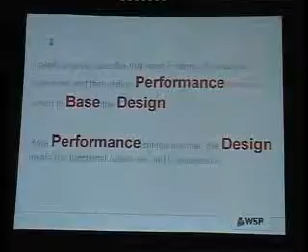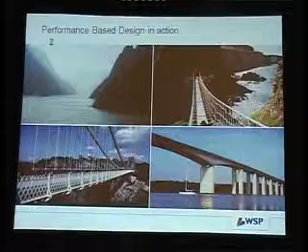If you imagine you've got a gorge you want to build a bridge across, nobody starts off by saying, I must have a steel bridge across my gorge. What they do is think about the different options. They employ an engineer who will think about what the needs are of that bridge, what it needs to carry, what its lifetime needs to be, what its costs are, what the aesthetics need to be, what the program for that bridge is. Then they come to a design conclusion that is appropriate for the performance it needs to meet.

We would think it completely mad to say every bridge has to be designed the same way, or that every tall building had to be designed structurally the same way. And yet that's exactly what we do with traditional fire codes. We make assumptions that all buildings of a certain type at a certain height are the same, no matter where they're placed, no matter how they're built, no matter how they're going to function. As a result, I think we're creating inappropriate building designs.

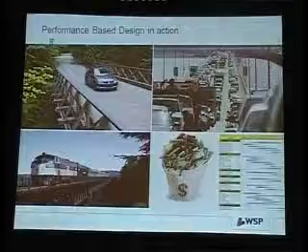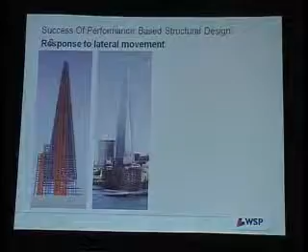So why have I shown a bridge example here? Well, I think it's a simple one to understand. Before we had tall buildings for structural engineers to show off with, bridge design was where it was at - the best structural engineers from previous eras designed the most fantastic bridges. But now we apply the same principles to structural design: we design for the performance the building has to meet. The result is great innovation in structural design.

This is the London Bridge Tower. It has an unusual mix of steel, concrete, steel design as you go up the tower, which takes out the need for mass dampers in the building. It's a great bit of innovation. No one said you had to build a building that was steel, concrete, steel. No one said you had to put a mass damper in. What they said was, I don't want it to sway too much, here are the limits, now design a building to match that performance.

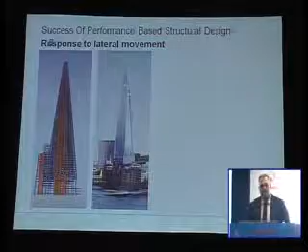We do the same thing with structures for seismic design. In fact, if we didn't design buildings performance-based for seismic design, we'd end up with horrendously over-designed buildings in some areas and badly under-designed buildings in other areas.

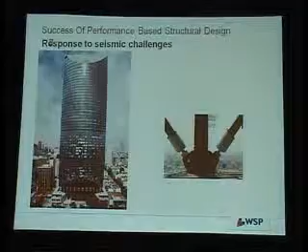It's wrong to think that people who are funding and building tall buildings have this magical pot of gold and aren't interested in cost savings. Of course we're interested in cost savings.

Even though we have the economic problems we have at the moment, even before that, even in places people think have limitless wealth, like Abu Dhabi and Saudi Arabia, cost is still very, very important. And economics is very, very important, and aesthetic is very, very important. And these things drive things like structural design.

And yet still, in so many situations, we don't design on a performance basis for fire safety. Instead, we design to a set of prescriptive, codified rules. And all too often, we're applying codified rules from one country to another country.

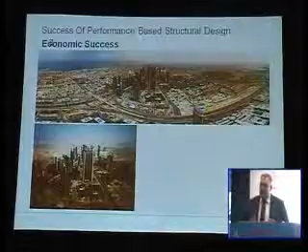There's no point in sitting there saying, well, if we adopt this different prescriptive code, it won't happen. I could show you examples of tall building fires, devastating tall building fires, related to any international building code. It's not that those codes are failing, it's just that there's inherent failure in using that particular approach.

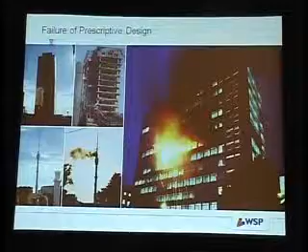The biggest problem with using prescriptive designs, taking a codified approach from one country to another, I think, is a design legacy. Those that heard Anthony Wood talking yesterday morning, he used the Seagram building to illustrate the fact that we shouldn't move architecture from one place to another. We shouldn't just cookie cut building designs.

Someone mentioned this morning in one of the sessions about the problems of pressurizing elevator shafts. The Indian code gives you a way around that. In fact, it prefers you not to use pressurization if you can do it. And it says instead put the stairs on the outside of the building.

Now that's quite a dramatic structural thing to do. But the reason it says that and the preference for that is because the problems of maintenance, of installation, of construction make pressurization systems very, very hard to design and build in this particular country.

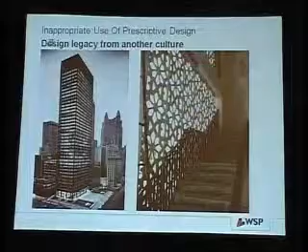It has to prevent smoke movement. It has to protect firefighters. It has to protect the means of escape. What does it mean to protect the means of escape? It means keeping smoke out for a certain period of time. What does it mean to protect firefighters? It means to protect them for a certain amount of time and achieve certain temperatures.

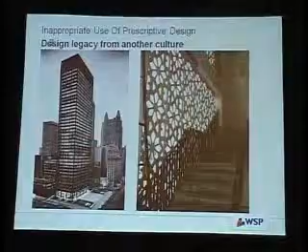Once you take away the premise that we're going to use a particular system type and instead say, what does the system have to achieve, you're using performance-based design.

Here in Mumbai, I think you are starting to see a certain architectural style forming. I love the extensive use of cantilevers and big holes in the buildings here. I think it's fantastic. I think the Antilia Tower is a classic current example of that.

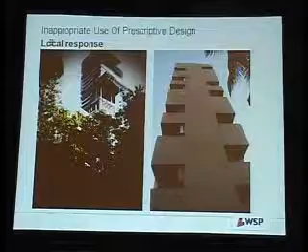There's a lot of people I've met, particularly from Western countries, who said it's a terrible abuse, that building—one family in 27 stories. But given the land values in Mumbai and the problems of floor area there, they're not taking up any more space on the ground than one family would occupy. Sure, they're building this edifice in the sky to celebrate their family, but I love the use of cantilevers and the holes in it.

And then you've got the older building there as well on the right, which again only has about 30 apartments in it. That to many people in the West would seem very strange. These aren't the sorts of buildings that traditional building codes were really designed around. To try and apply a traditional prescriptive building code to this type of building, you have to really bully it, twist it, and break it a bit.

And when you try and do that in a different country from the place the code was originally intended for, you start getting some real difficulties. You can make it work on paper, but you're really putting a lot of faith in that original building code and matching its original premises.

What you're doing is assuming safety. What performance-based design is about is proving and demonstrating safety. You're not leaving it to chance, or to someone who designed a building code 20 years ago that you're copying. You're actually setting out to prove that you have safety.

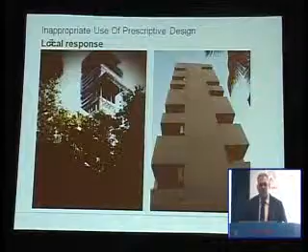If we're going to build these vertically integrated cities, we need to handle those sorts of questions. And you're not going to find those answers in standard building codes, because no one's been through that design process properly. If you want to build integrated mixed-use buildings, you'll find that very poorly handled in traditional building codes, which tend to pigeonhole buildings into one single type.

And when they do talk about mixed-use buildings, they have a habit of saying, well, just adopt the worst case. So you end up with buildings that waste money, waste space within them. And the problem isn't just that you don't build the building because it becomes too expensive—it's not just that you've spent too much money.

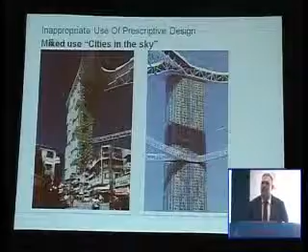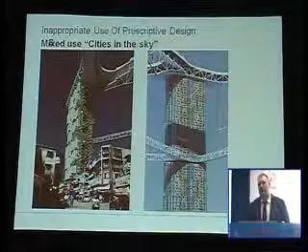If you took the same budget and applied that money elsewhere in the design, you could either save money or make the building safer. You could apply the money appropriately. So performance-based design isn't just about cheating a bit and trying to make things cheaper—it's about using the money appropriately and creating value in buildings.

So you want to create these buildings, but you can't do it through standard design. Yet there's a great fear about performance-based design, a great phobia about it. I think there are three fundamental phobias. The most significant one is the fear of putting your name to it—the fear of the signature.

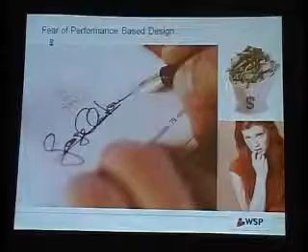I appreciate building code officials who have to sign off buildings. It's their name on a piece of paper, and they're the ones who may ultimately be held up in court if a building is found to be inappropriately designed. And yet they will happily sign off buildings designed to international building codes whose basis they don't know, and that aren't appropriate to that particular building. The faith put into international prescriptive codes is quite worrying.

At least with performance-based design, that building code official has the opportunity to question the design, to actually dig into the assumptions you're putting forward as a designer, and answer whether or not those assumptions are appropriate. And it becomes a partnership with the building code official—working with them, not against them.

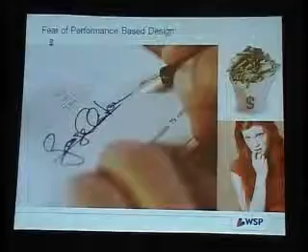Not trying to work around them, not trying to put something up there that's going to amaze them and just flatter them, but working with them to create something together and to gain their trust.

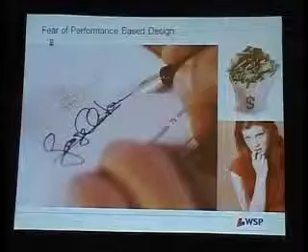There's some opposition that comes in from suppliers of building products. Sometimes they're worried about losing money when we have non-standard design solutions. A lot of performance-based design revolves around, for example, taking out fire protection products. Well, having standardized building products hasn't stopped the structural engineering community from working together with those people, and nor should it in terms of fire safety.

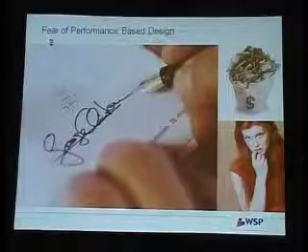In fact, performance-based design opens the door to many more innovative and new fire safety products. We hear people talking about lift evacuation, elevator evacuation. We hear people talking about innovative suppression systems. All of that is only possible through performance-based design, because there's a long lag between new technology and its application to building codes.

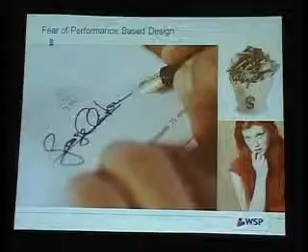And I'm afraid that can only be resolved through education, support, and working together with code officials, other engineers, and designers. So many times where I've carried out a performance-based design, the local engineer will be worried because they haven't understood it. And it's very easy for an engineer who's used to working in this sort of design to stand up and say, well, clearly that person isn't educated enough, or that person hasn't understood what I say.

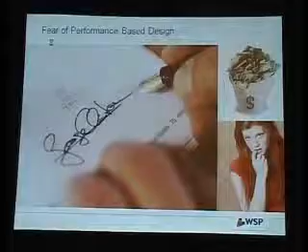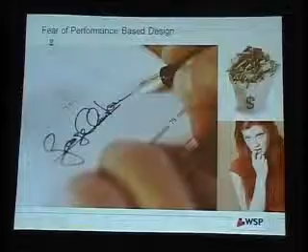My response to anybody in that position is that if someone hasn't understood what you're saying in your design, that's your problem, not theirs. You should be able to break performance-based design down into very, very simple building blocks and explain each individual block. If you can't do that, you're not doing it right.

Now, I've given international codes a bit of a knocking, saying they're probably the wrong way to design buildings. In fact, the international code community have responded to performance-based design brilliantly. You'll find in the latest versions of the NFPA code, the International Building Code, performance-based design options within there. My personal preference is that actually the standard code approach should be one of the end solutions from the performance-based design rather than the base version.

And I know that's something NFPA, for example, are looking at - they may introduce that you should look at all the building risks before you start applying the standard solutions. In the UK, we've had Approved Document B, our standard prescriptive guidance, but it specifically says you shouldn't use that for large and complex buildings, and that performance-based design is what you should be doing for those sorts of buildings.

Anybody who thinks you can't use performance-based design in China, I'm afraid that's wrong. You can use performance-based design in China, and I'll show an example of a performance-based design building from China in a minute. And there are countries like Korea who are entering into major building programs at the moment, and they've recognized that actually the only way of designing tall and complex buildings is to use performance-based design.

And they've taken a very good analogy from the semiconductor industry, where they applied a lot of prescriptive legislation, and it slowed down the development and innovation in that industry. And when they applied that to tall building design, they turned around and said, we need to free up tall building design from prescriptive codes. We need to introduce innovation that frees up the buildings and allows them to be created. Very soon, you will have to adopt a performance-based design for fire safety of tall buildings in Korea. And I think that's a fantastic step.

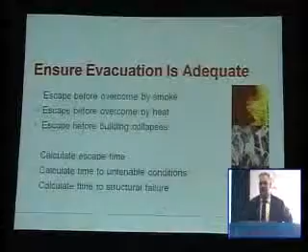So if we break the evacuation one down a little bit further, we start getting down to things you can actually measure, things you can calculate. You can calculate how long it takes to escape and calculate how long before conditions in a fire compartment become untenable. And we're no worse at calculating that than we are at calculating structural stability.

And yes, we apply safety margins and safety factors. But the beauty about performance-based design is that we can start trying out different solutions to extend those times to untenable conditions or to reduce the evacuation time. We can try out diverse different solutions.

I can compare mechanical smoke exhaust and pressurization to adding sprinklers or more compartmentation. I can compare lift evacuation or elevator evacuation to pressurization as two alternatives in a building, two completely different mechanical systems. But using performance-based design, I can compare those options. I can also, very importantly, take into account the reliability of those systems and whether we think they're actually going to work in practice. And then you start to see some very interesting solutions.

And one of the most interesting things in performance-based design is the evolution of risk-based design, which has been around in the petrochemical and the nuclear industry for a long time, and we're starting to apply it to actual building designs by comparing diverse systems using numerical risk-based probabilistic analyses.

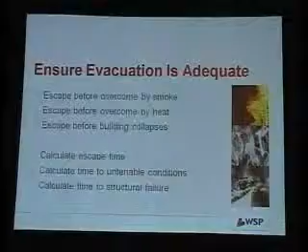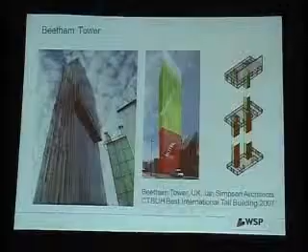So what does a performance-based design building look like? I should really stop using this example and start bringing out some more recent ones, because I've got plenty of them. But it's a nice building, it's fully built out, and whenever we talk at the CTBUH, it did win the CTBUH Best International Tall Building Award, so it's quite nice to roll it out.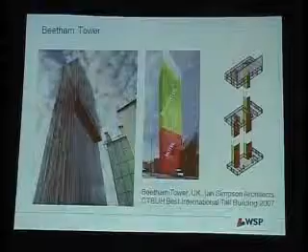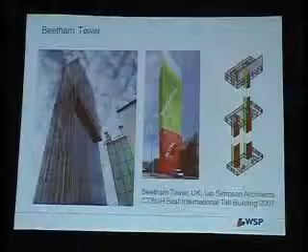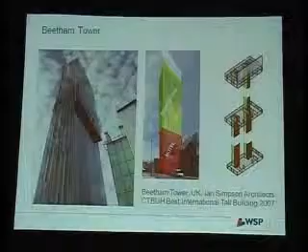When we designed this building, it was started just after 9/11, and everyone was challenging what were the fire safety requirements for tall buildings. There was a huge shift going on. Some people were saying we shouldn't even build tall buildings. Some people were saying we must put 3 staircases in. Some people were saying we must put 4 staircases in and 2 hours and 4 hours fire protection. So our client got a bit nervous, their investors got very nervous, and the approval authorities got really nervous about what they were going to approve.

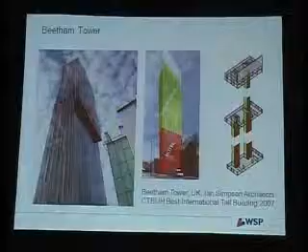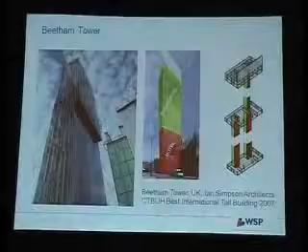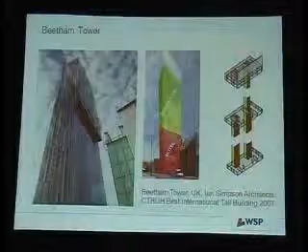They didn't want us to stick to a standard building code. What we did was sit down with the code officials, the users, and other technical people to actually work out what were the real risks in the building. What were the barriers to achieving making it safe? And one by one, we addressed those particular requirements in an integrated design solution.

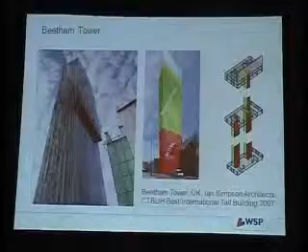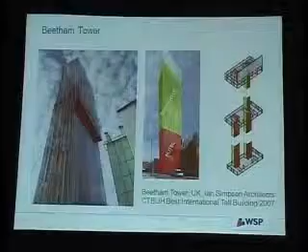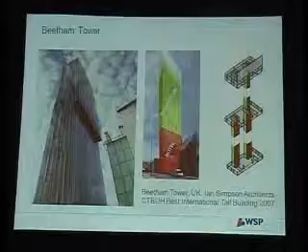As a result of those analyses, we ended up with some very interesting design solutions. In particular, the fact that the top half of the building has a single escape core. It has one staircase, and it's a 50-story building. Even more remarkable, perhaps, is the fact that it does that without having sprinklers in the top half of the building. And we're able to achieve that by a great synergy between the structural design and the fire safety design that gave us superb quality compartmentation in the building and some very careful design of the slab edge details so the facade fire spread wasn't a problem for us.

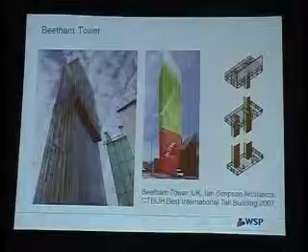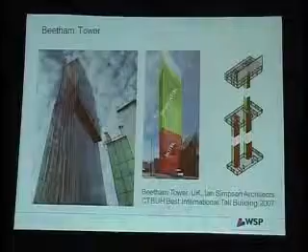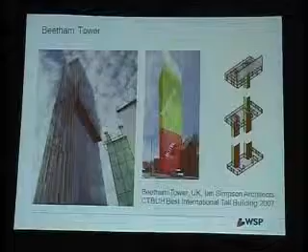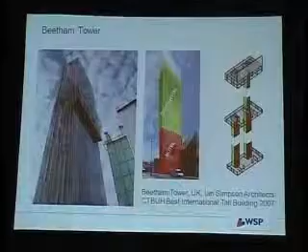At the same time, we took out pressurization from the tower and put in an alternative ventilation solution that was both more economic, it took up less area, and it's more robust as well. It doesn't rely on the building envelope leakage paths, etc., to make the pressurization work. It uses installed shafts instead. It's also a system which, if the mechanical fans fail, it still has a natural component, providing about 70% of the ventilation. So it's a much more robust solution than traditional pressurization, which was also a lot easier to design. We could design that system without having to worry about a lot of the details of the actual final building construction. So it gave us great cost certainty very early on in the building design.

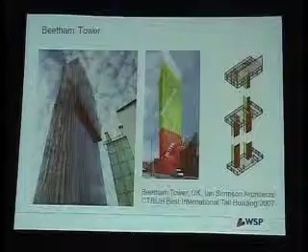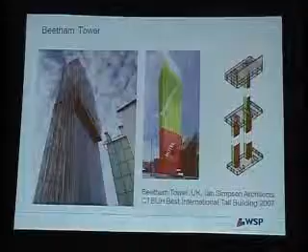Putting all these things together, we were able to design a building where, if we did get fire spread between floors, the fire service could still clear those floors of smoke. And you won't find those sort of requirements in standard building codes. We gave the fire service a building where they could flexibly fight fires in different locations.

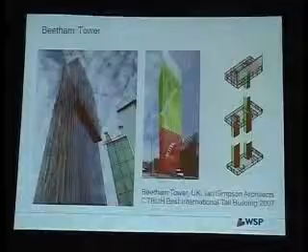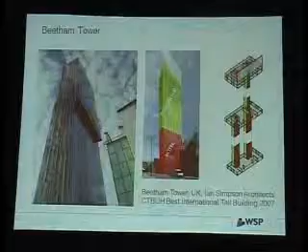We designed a building for occupants that if they wanted to stay in the building, which was actually the safest thing to do in this particular case, they could do so. But if they decided to evacuate, they could also evacuate. Designing for those two different criteria. And the standard building code in the UK would have assumed that everybody stayed in the building, wouldn't even cover the possibility of people deciding to evacuate.

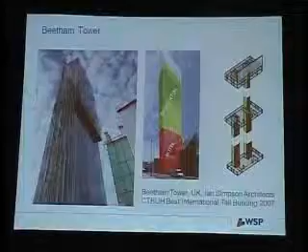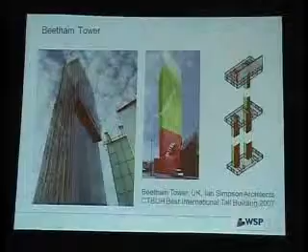That's one of the big questions that came up after 9/11, about people not being prepared to stay in tall buildings when they're on fire. So we had to address all of those. And the only way of doing that was through performance-based design, setting ourselves a set of key targets, key challenges that could be addressed through detailed analyses.

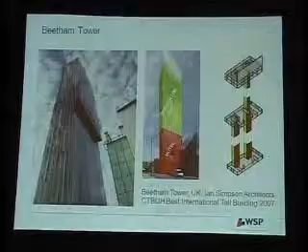I mentioned a version in China. This is the China Poly building in China, designed by SOM. It's a fantastic building. It has a 13-story mini building suspended within the main building via those steel cable arrays you can see here. Now, those are steel cables holding up a building inside another building. Good luck trying to find a fire resistance product that can actually protect that to achieve the 2 hours fire resistance that was being asked.

The only way to actually make that building work was to use a performance-based design approach, to look at what the real fire risks were, to understand what the implications on the steel cable were from them being hot, and to design around that particular problem. At the same time, it has a very large, very tall atrium space, and we performance-based designed the smoke ventilation system and the facade system in there to prevent fire spread, but also to produce a more economical solution.

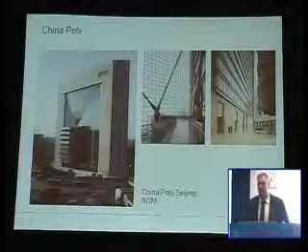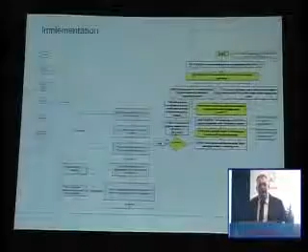And that's done in China. A lot of people say you can't do performance-based design in China. Rubbish. Of course you can. How you implement performance-based design, particularly in a country where you haven't used it extensively, could be quite difficult. And there's 3 different models there, one from the UK, one from Singapore, and one from Hong Kong. So there are different flowcharts you can put forward for actually achieving performance-based design.

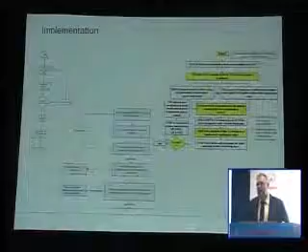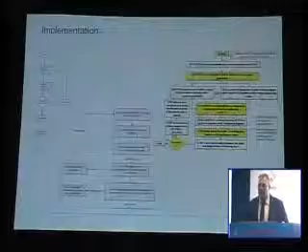But the main thing is about creating a trust between the approval authorities and engineers. A trust that performance-based design engineers are not trying to pull the wool over their eyes. That actually we're giving the approval authorities the opportunity to question design, but coming to those questions with the answers already prepared.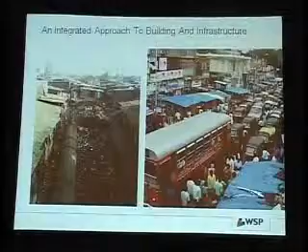For a city like Mumbai, that's embarking on a major regeneration program, we heard a lot yesterday about infrastructure and the challenges of infrastructure, how we deal with those problems in the city. And I saw some great ambitious plans with some quite long dates on them. And I'm quite sure that Mumbai will put in place all of the infrastructure that's expected before it builds some of these tall buildings.

But if it doesn't, if someone could show me a traditional prescriptive building code that assumes that the streets are clogged with traffic, like in that picture on the right, or that the buildings you're dealing with may be surrounded by buildings like those from Dharavi on the left, then I'll be very impressed to see that particular code. So Mumbai should be thinking about a performance-based building code approach as an umbrella term for a lot of the redevelopment sites.

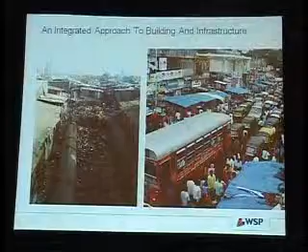And then for each individual site, looking at the individual risks, the individual challenges about those individual sites, and creating building designs that actually relieve the pressure on the infrastructure. That can be done, and it's being done in places like Dubai and Abu Dhabi, where there are city-scale projects currently being planned or under construction, where whole site fire codes using performance-based approaches are being applied very successfully. So that approach can work. It can deliver cost savings, but better safety at the same time.